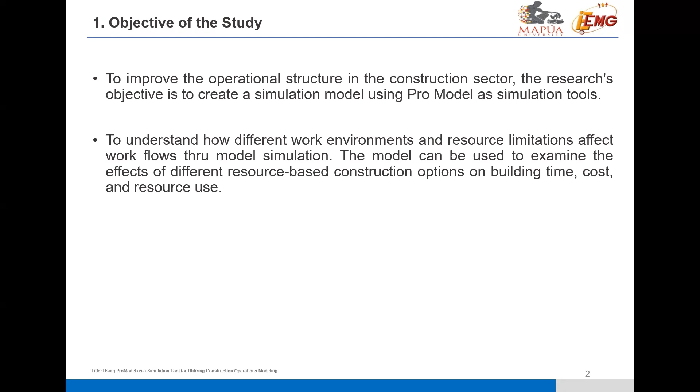The model can be used to examine the effects of different resources based on construction options on building time, cost, and resource use. Also, to assist construction personnel in evaluating, analyzing, and making decisions about current conditions by using the ProModel result.

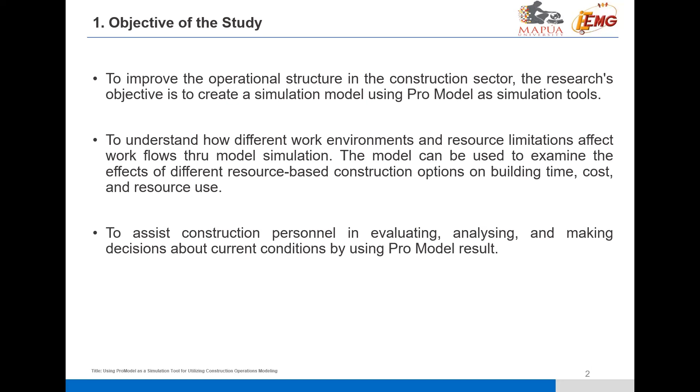Background of the study, or literature review. These slides highlight recent research on operation management in construction, as well as the usage of ProModel application in our construction operations integrated simulation framework. The usage of computer simulation in the building industry is also covered.

First off, modeling simulation limitations and the use of inaccurate data limit the relevance to the field of construction management, despite the fact that better tools may now be paired with computer simulation approaches to examine building projects.

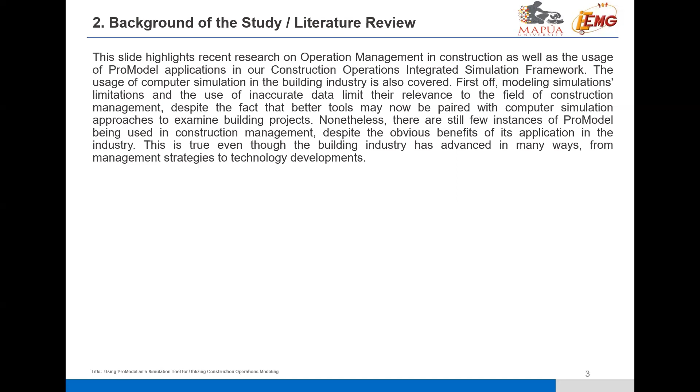Nonetheless, there are still few instances of ProModel being used in construction management, despite the obvious benefits of its application in the industry. This is true even though the building industry has advanced in many ways, from management strategy to technology developments.

Simulation: simulating a process or system entails reenacting how the actual system reacts to ongoing events. Designers and engineers utilize simulation modeling to better understand whether, how, and under what circumstances a part could break, as well as what stresses it can withstand.

With the contribution of Harris and Kahn, who systemized the initial simulation techniques applied in several circumstances, the study of simulation as a field of knowledge began in 1948, according to Aspray, 1990.

Some of the well-known simulations resulting from the development of computer technologies include the Monte Carlo methods and the application of statistical and physical mathematical models by Coss.

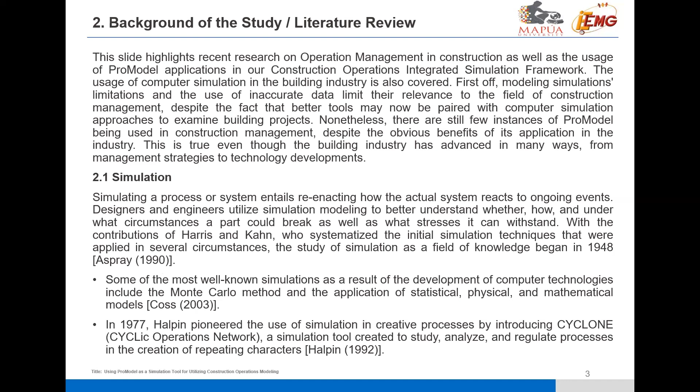In 1977, Halpin pioneered the use of simulation in the construction process by introducing Cyclone, a simulation tool created to study, analyze, and regulate the processes in the operation of repeating cycles. This is by Halpin, 1992.

A more user-friendly, straightforward manner to describe simulation and processes was made possible in the 2000s by 3D visualization technologies, as stated by Kamat and Martinez in their 2008 study.

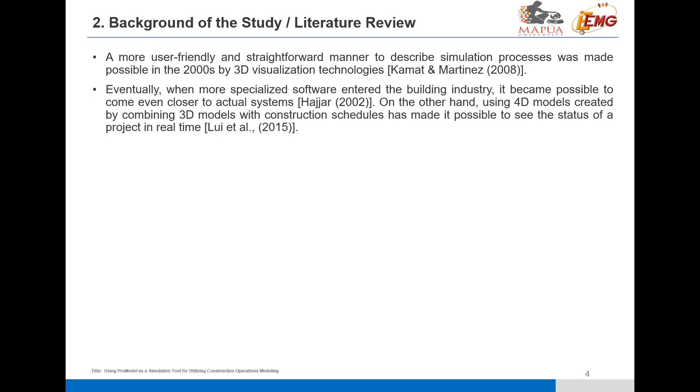Eventually, when more specialized software entered the building industry, it became possible to come even closer to the actual system. On the other hand, using 4D models created by combining 3D models with the construction schedule has made it possible to see the status of the project in real time.

Now, using ProModel. It is an object-based modeling system with an easy-to-use graphical user interface and tools for object-oriented modeling, for discrete-event simulation, which simulates changes in system state across discrete time. Both methods do away with the need for programming.

According to Martinez and Photios in their 1999 taxonomy of simulation approaches, ProModel is a process interaction, PI-based simulation methodology. Other paper instances use ProModel to examine the amount of client waiting time lost during bank service operations.

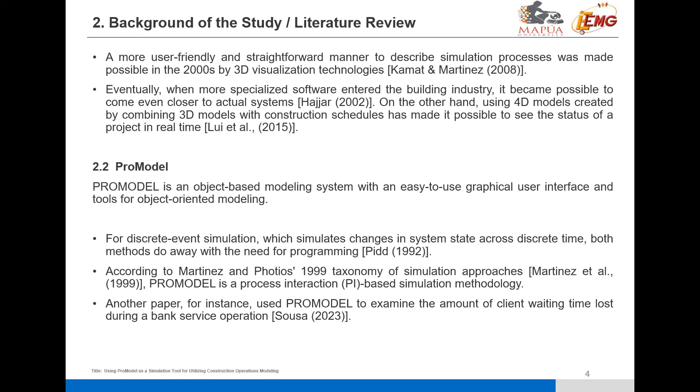On my part, I'm going to discuss the methodology. Let us look at the components and model analysis.

The actual building process for a concrete pouring scenario was examined following the actual concrete pouring of 200 cubic meters, which is necessary to pour into the slab and beam utilizing a bucket and tower crane over a one working day period, to develop the simulation under the ProModel environment.

The researchers considered a local concrete ready-mix supplier who has met the following qualifications: the ability to supply large volumes of concrete, a sufficient fleet of concrete transit mixers, a batching plant location within an acceptable travel distance, quality of service, a professional profile, and a reserved batching plant in case of plant breakdown. The following components are considered.

Location: these are the places where entities are processed or held. Locations are used to model elements like test stations, recycle centers, unload bays, parking areas, and the working process. There are seven locations implemented in this study.

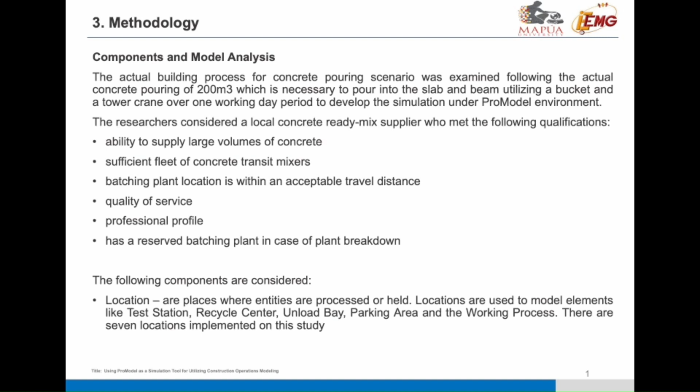Entities, which contains the concrete batch, unit concrete, and concrete waste, which are tracked as it moves through the system model. Arrivals are the accesses of system entities, where the amount of each entity is one truck arriving at each location.

Events, which includes the arrival of concrete, work in progress, and finishing. Activities include the concrete testing once the truck arrives at site, concrete truck waiting in line when the tower crane is busy loading concrete from another truck. It also includes concrete unloading, concrete transfer by bucket aided by tower crane, concrete pouring, vibrating of poured concrete, and leveling of poured concrete.

Next is processing. It describes the entities transmitting within the system and the procedures that take place for each entity at every location. Note that the first truck arriving at site is processed initially.

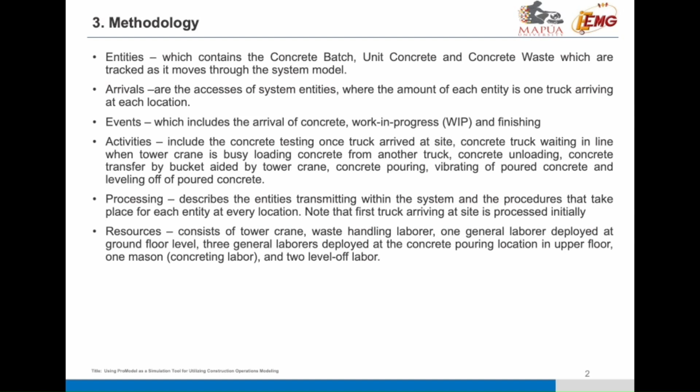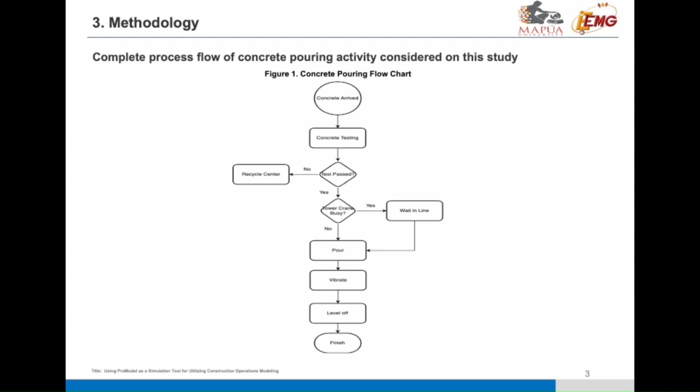Data collection. Let us discuss data collection. Researchers gathered the normal approach or procedure of concrete pouring in Qatar to develop the basis model.

Researchers ensured that the simulated concrete pouring process and activities adhered to local and international standards, such as ensuring that the concrete is tested by an approved third-party laboratory and that the allowable time duration between transportation of concrete and placement of concrete was considered.

The researchers discussed all of the information gathered during this simulation and appraised the outcome, rate of concrete pouring, and bottleneck of the operation. To estimate the deterioration probabilities of concrete, to determine the concrete pouring rate, and to determine the possible outcome of the simulation, the concrete properties, transport time from batching plant to site, time consumed during concrete testing, time consumed during queue at site, and discharge time will be required.

The number of trucks in the system's queue, as well as the processing time from truck arrival to concrete leveling off, are all possible outcomes.

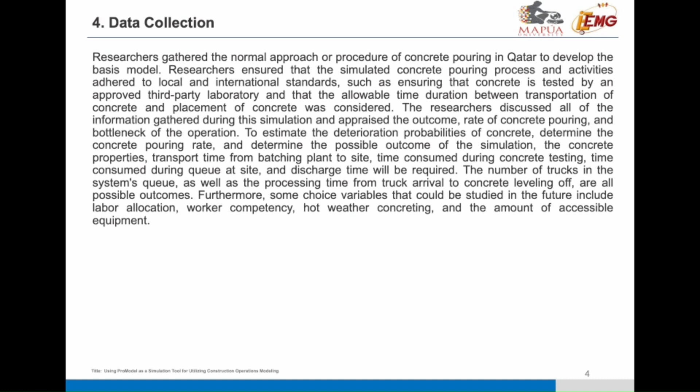Furthermore, some choice variables that could be studied in the future include labor allocation, worker competency, hot weather concreting, and the amount of accessible equipment.

On my part, I will be discussing results and discussion. Modeling elements of ProModel.

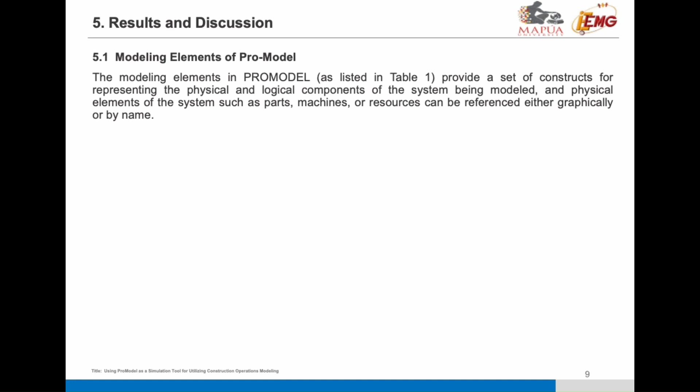The modeling elements in ProModel, as listed in Table 1, provide a set of constructs for representing the physical and logical components of the system being modeled, and physical elements of the system such as parts, machines, or resources can be referenced either graphically or by name.

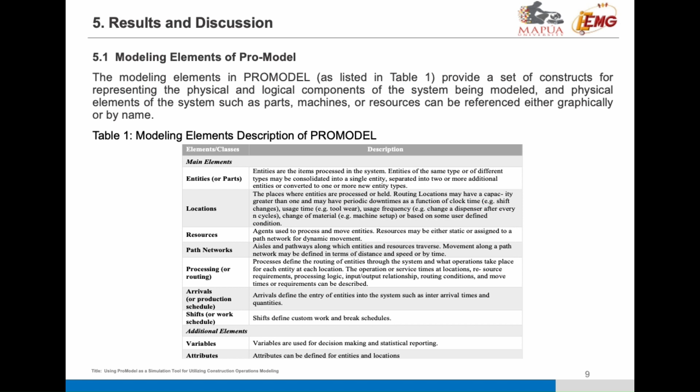A ProModel contains main elements such as entities, locations, resources, and path networks, and interactions such as arrivals and processings. It also has additional elements such as variables and attributes, which we'll be discussing in our ProModel simulation on the succeeding slide.

Case study: a concrete pouring and waste handling simulation model with ProModel. The case study is part of a concrete building construction located in the Lusail Boulevard project in the city of Lusail, Qatar. 200 cubic meters of concrete was required to be poured into the slab and beam steel formwork using a bucket and a tower crane over one working day period.

28 truckloads of ready-mix concrete, each 8 cubic meters, were delivered from an off-site concrete plant to the site. It took about 26 minutes to unload one truckload of concrete, which could fill up about 5 bucket loads. The tower crane swung up a full bucket of 1.5 cubic meters, poured concrete into the working area, and then swung down the empty bucket to the truck unloading area.

Laborers then vibrate concrete and level off the surface of the pour section. A total of 136 pour sections were placed on that day. In addition, 0.15 cubic meter of each truckload of concrete was unloaded by a worker for slump test at the quality control testing station. The concrete waste from testing was collected and transported by the worker to the recycling center on site for making concrete blocks.

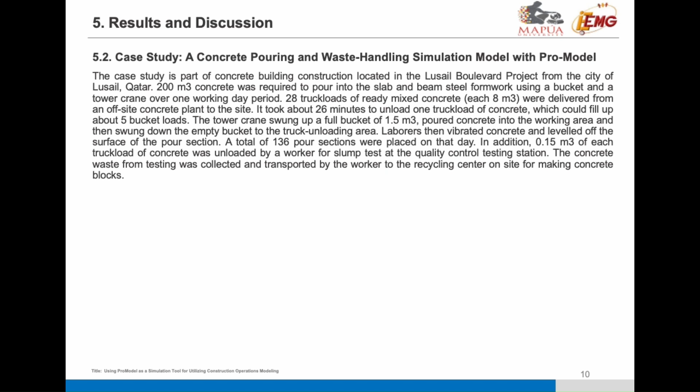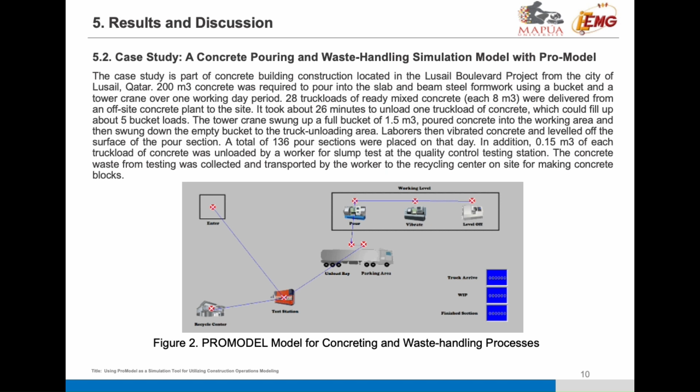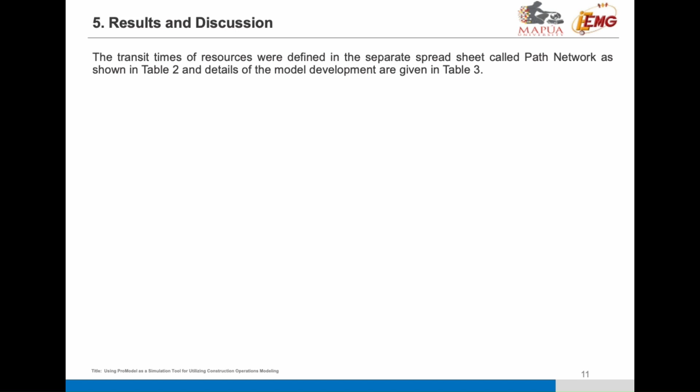The resultant ProModel is shown in Figure 2, which shows the interrelationship between locations defined in the processing. The transit times of resources were defined in a separate spreadsheet called path network, as shown in Table 2, and details of the model development are given in Table 3.

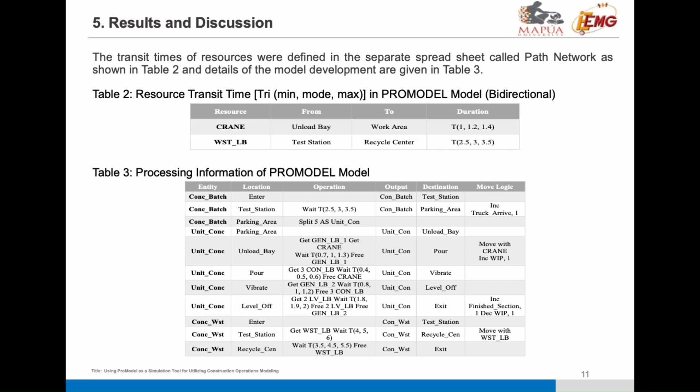In conclusion, the construction sector is constantly looking for better ways to manage construction projects and enhance productivity. Delays in construction projects are common and can occur for a variety of causes, which can have a significant financial impact on the project.

To avoid project length delays and improve the operational structure, a model for discrete event simulation of the tasks and materials needed to generate cast-in-situ concrete casting in Qatar construction projects is proposed in this study using ProModel. The model simulates the effects of various work environments and resource constraints on workflow.

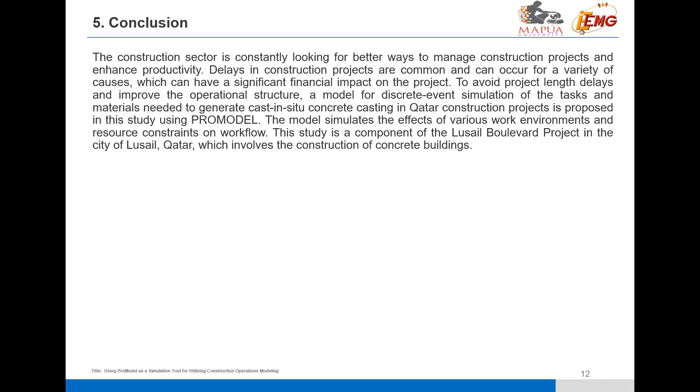This study is a component of the Lusail Boulevard project in the city of Lusail, Qatar, which involves the construction of concrete buildings. The case study presented in this report demonstrated the use of ProModel in simulating a model for concreting and waste handling processes.

The model provided a detailed representation of the system being simulated, including the arrival of concrete batches, the processing of concrete, the collection and transport of concrete waste, and the transit times of resources.

These simulation results generated by the ProModel accurately reflected the real-world scenario and provided valuable insights into the performance of the system. The model revealed the average pour duration of 540 minutes, the valid pattern of resource movement, and the correct sequence of activities.

The use of ProModel in this case study demonstrates the effectiveness of simulation modeling in analyzing complex systems and optimizing their performance. The development of simulation models will allow construction companies to monitor and reduce project completion delays. With its comprehensive set of modeling elements and user-friendly interface, ProModel is an excellent choice for organizations seeking to optimize their systems and processes.